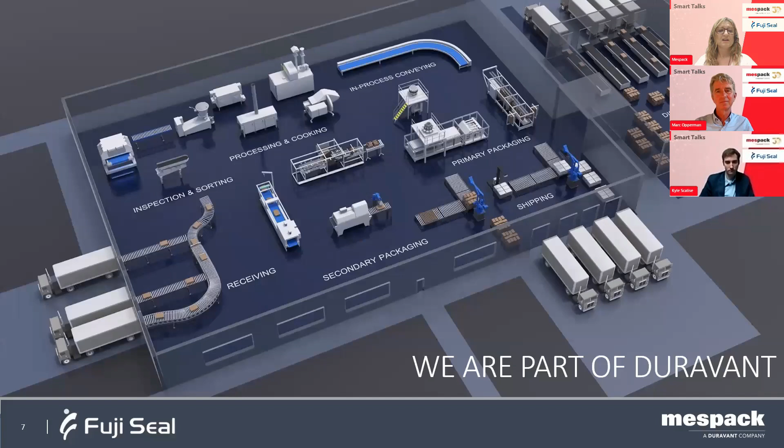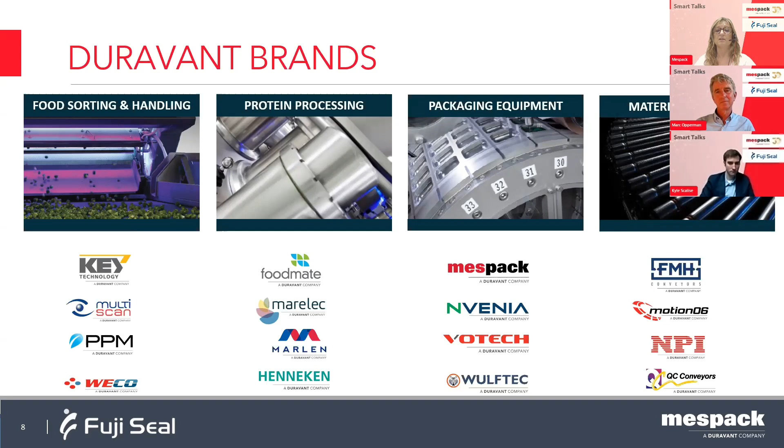Mespack, headquartered in Barcelona, is a global leader in flexible packaging and equipment for consumer packaged goods. We are known for our innovation in creating sustainable packaging solutions. Mespack has been part of Duravant since 2015, a leader in the world of industrial equipment, headquartered in Illinois. Duravant is a global engineered equipment company with manufacturing, sales, and services facilities throughout North America, Europe, and Asia. Duravant offers immediate and lifelong aftermarket support across different sectors, serving food processing, packaging, and material handling industries worldwide through its diverse portfolio of operating companies and brands.

At Mespack, our talented engineering team designs customized integrated solutions for primary and secondary packaging. We are located in Barcelona, established in 1984 as HFFS OEM, and we now have a worldwide sales and services network. We are part of Duravant, as we said before, and we serve a large portfolio of customers around the world.

We now have 380 employees, 80 engineers, and 120 service techs, with manufacturing and commercial offices around the world totaling around 70,770 square meters. Regarding our industry, we cover different sectors like food, beverage, pet food, pharma, personal care, and home care, among others.

In our portfolio, we offer design customized integrated solutions for primary, secondary packaging and end of line processes. With our extensive portfolio, we offer high precision, efficient, and versatile horizontal form, fill, and seal machines for flexible packaging, including machinery for pre-made pouches that you will see here today in our webinar, and a wide range of vertical form, fill, and seal equipment. Additionally, we provide Hydroforma machines for water-soluble pods and end-of-line equipment to fit your secondary packaging needs, offering turnkey solutions if required.

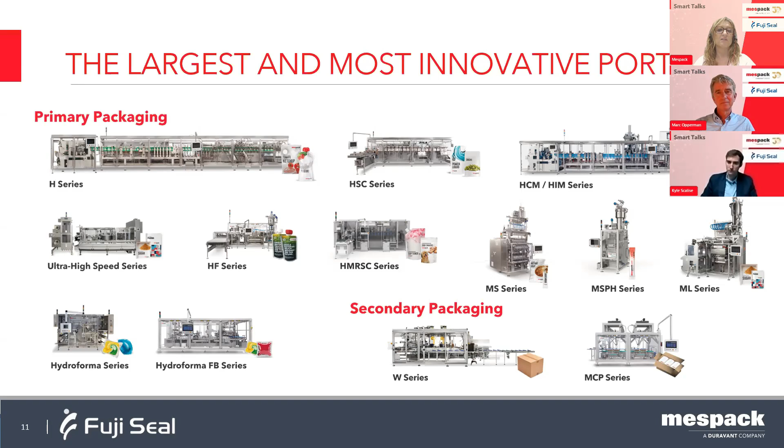At Mespack, we are really committed to sustainable packaging solutions, and our focus is on developing special mono-material packaging options which are easier to recycle and reduce waste. This marks the beginning of our introduction to Mespack, providing you the opportunity to familiarize yourself with who we are. Now it's Fuji Seal's turn. Marc, I'll pass you the floor. You have the remote control now.

Thank you, Monica. The slides are not visible for me. Can you bring the slides up? Now do you have the control, Monica? Yeah, I have the control, but I don't have the slides. Okay, I can pass them to you.

Is this okay, Marc? I'm not seeing the slides. Can you see, Kyle, the slide? Yes, I can see them. Well, okay, there we go. Yes, sorry, in the wrong screen. Perfect, thank you so much for that introduction there.

Fuji Seal indeed happily cooperates together with Mespack. We're in this partnership where we are going to help the market get the pouch introduced into new packaging means in your factories. Fuji Seal is a global supplier of packaging materials with factories around the world, in the States, Europe, Asia, Japan. We provide mainly 3 product groups: shrink sleeves, pressure sensitive labels, and spouted pouches. We also supply the equipment that comes along with those materials and the services required to get them to operate well. In this specific case of pouches, we work together with Mespack, and the machinery know-how of the filling comes from Mespack. We work together in this partnership to make sure systems work well at customers' factories.

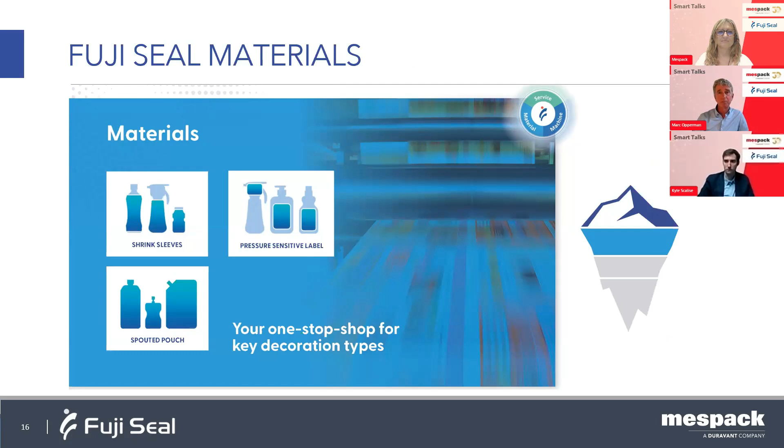Can you get me the control again? Thank you. These are the materials that show you the shrink sleeves, the pressure-sensitive labels, and the spouted pouches. In addition to pure decoration, we're also involved in the packaging itself, the container itself.

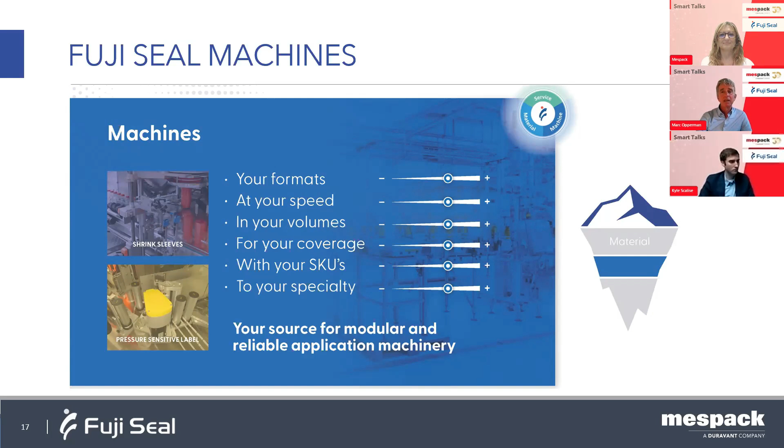Then we supply the machines that support those materials. They are well connected, so we can guarantee performance at customer locations. The machines run with high performance and high efficiencies on the materials that we provide, but also on materials that others supply, and you can run the machines with materials from other companies.

Underlying supportive services mean that every packaging material has its own specifics around design and how to create an artwork and get it onto a packaging material. We make sure we identify the right materials for your application, and we support the ramp up and startup of processes.

The topic I would like to bring to attention today is mostly the Fuji pouch. The Fuji pouch is a spouted pouch, as many others are, but the only difference is that the Fuji pouch has a unique shape, visible here. You can see the container is almost like a bottle because it's cylindrical, created by the fact that we have two gussets, one at the top and one at the bottom. In your screen you now see the so-called inverted pouch, which stands on its cap, but it's the same Fuji pouch, again with the two gussets, top and bottom.

The advantage of this shape is that it is more compact. So for marketeers, maybe not ideal, but for sustainability, it's the better format because it uses a lot less material than a typical doypack would. A typical triangular shaped doypack will always have headspace and will therefore use more material than this Fuji pouch, which you can fill almost brim full. This introduces the benefit that there is no air inside the pouch, and therefore less risk of oxidation and a longer shelf life.

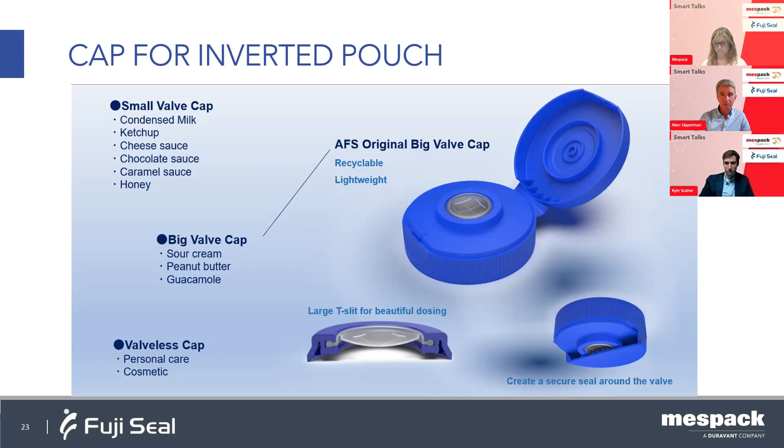The application is in many different products. Often we use a knife to get something out of a jar, or a tub, or a bottle is poured, and it stores air in the remaining top, or maybe you would apply a product from a cup with a spoon. At any rate, you empty out the packaging and air takes the place of the product. In the case of a pouch, which is all dosed through the nozzle, no air enters into the pouch, with the consequence that the product inside remains free from oxidation. You can also imagine that because nothing goes into the pouch, the hygiene level is a lot nicer than maybe in a jar or a cup. It's a convenient way of dosing, but it's also a lot more hygienic than an open jar or an open cup.

We spoke about convenience, about oxidation, pressure, the shelf appeal on pack, sustainability, and ultimately the evacuation. You can get all the product out simply by pushing on the pouch, and you can be sure that there's no residual product left when the packaging is wasted. The benefit thereof is obviously high on sustainability again, because if you have to remake a product, that is from a sustainability standpoint obviously the heaviest burden.

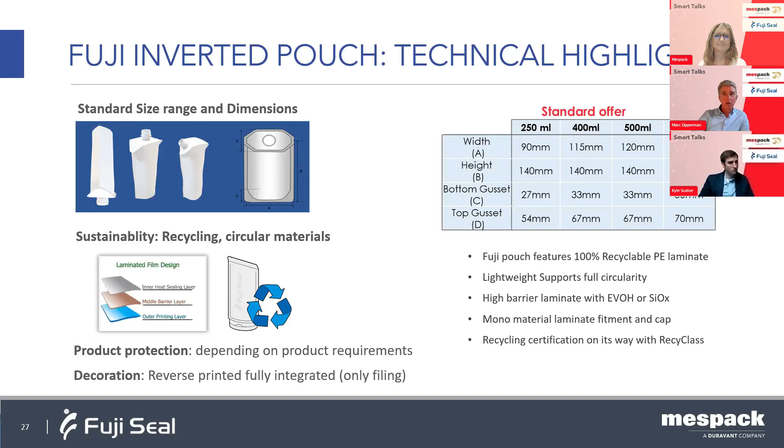But in the starting phase, maybe you don't want to bother making your containers yourself. So we would do that for you, providing a pre-made pouch which you simply fill in a filling machine provided by the partnership. The fitment and closure would be sourced by Fuji Seal.

We would make that pre-made pouch for you, and then that would go into your factory, where you would fill it in an HF series produced in Barcelona by Mespack. The alternative to pre-made pouches would be horizontal form-fill seal.

What's important here is to realize that these monomaterials have a melting temperature where all the layers lie very close together. The process of making that pouch and making a strong seal and a strong bag that is drop-test resistant and provides for your entire supply chain is in a way more challenging than before, when we had a surface layer of PET and an inner layer of PE with very different melting temperatures.

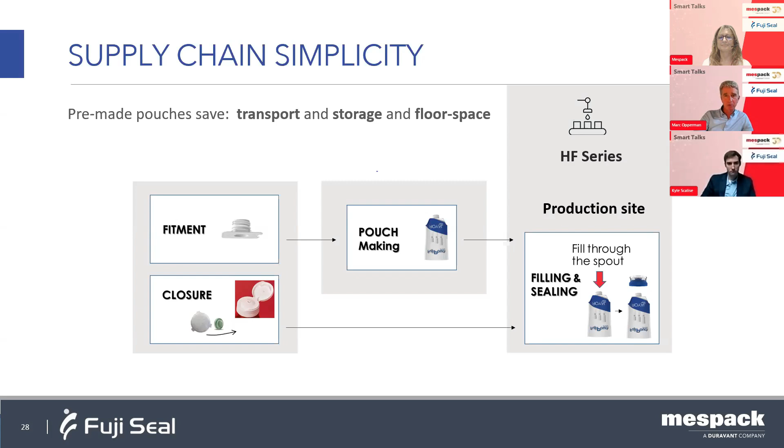Then I would like to hand the controls to Kyle here, who's going to explain the equipment that operates on either the pre-made pouches or on the form-fill-seal laminates.

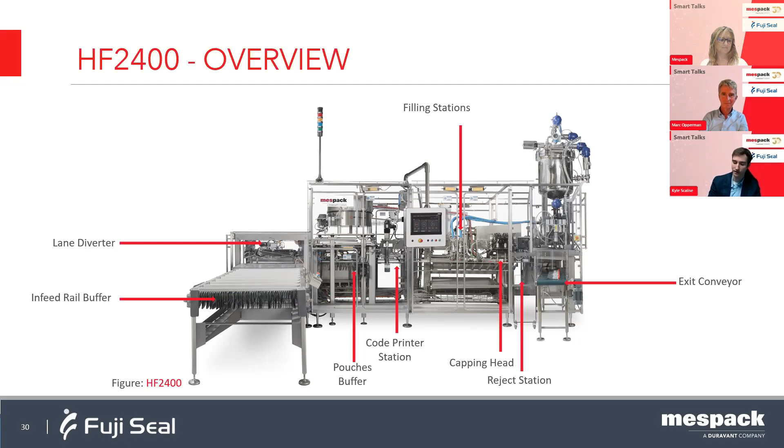We could also do some inspection in that area. We have our filling stations where we could do flow meters or piston pumps, depending on the characteristics of the product, whichever makes the most sense and meets the customer's requirements. We have our capping head where we apply the cap, and the reject station in case of any empties or if you run out of caps, so we reject without filling that pouch. Lastly, we have our exit conveyor where pouches are laid down on their back with the fitment to the side, leading to any downstream conveying systems.

Diving in further, here's an overview of the HF 1200, our entry-level model of the HF series. This machine can run up to 80 pouches a minute mechanically, so on a 150 milliliter fill, for example, 80 pouches a minute should be no problem. The machine has a maximum fill size of 1 liter, and at that size you're typically running around 30 to 40 pouches per minute, depending on the application.

On the HF 1200, on the left we have our in-feed, which goes through the pouch buffer. The star system transfers it from the rail system over to the walking beam side of the machine, where we hold the pouches by the neck of the fitment. We convey the pouches left to right throughout the machine, all by handling it at the neck. So below the neck, as long as the pouch is within the set criteria we can handle, we really don't care how it looks. It could be a die cut pouch, a curved pouch to assist in holding it, or a traditional Doy style pouch.

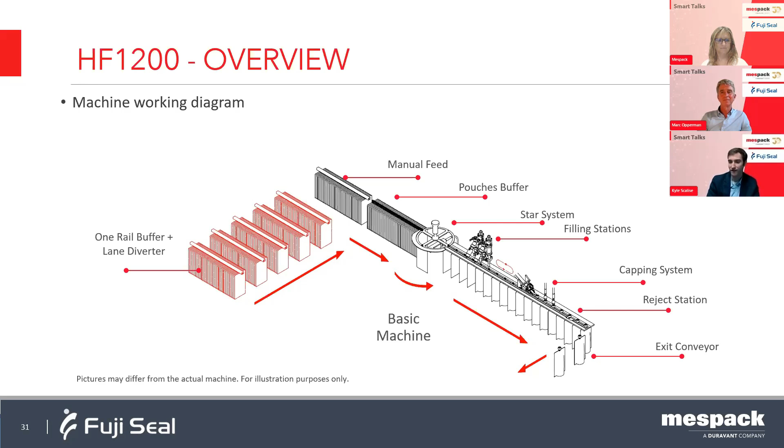After it's transferred off the rail system via the star system, that's where we can also apply the date code and a vision system to detect that, say, the barcode matches the HMI SKU you're running, so there aren't any errors or batches run of the wrong product. Then we go through the filling section, the capping, and the reject station, like I mentioned previously.

Here's an overview of the various models we offer. Apologies to anybody in the US, everything shown here is in millimeters, but I'll translate for you. On the HF 1200, we have the ability to run up to 80 pouches per minute, and a maximum format of 160 by 300 millimeters, width by height, and a minimum format of 70 by 100 millimeters. For the US, that's roughly 6.3 by 11.8 inches maximum, and 2.75 by 3.93 inches minimum. Again, we can run a maximum volume of 1 liter fills on this machine.

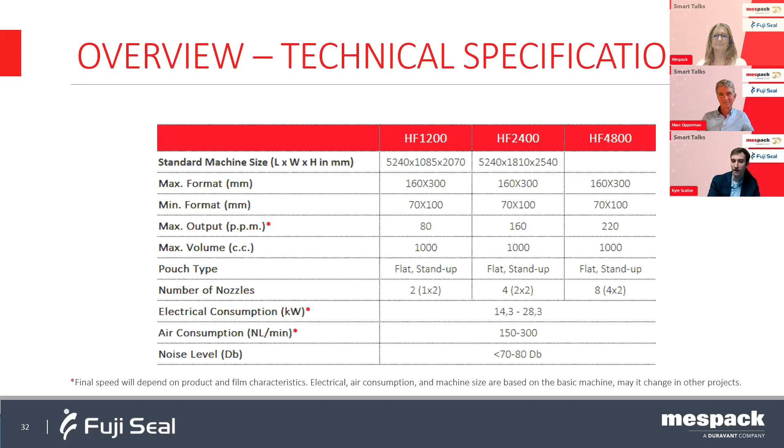The HF 1200 has the ability to have 2 different pumps and nozzles, just to maximize the output of the machine, where we're dosing in continuous motion. On the HF 2400, it's the exact same bag range, however it does increase the output up to 160 pouches a minute because there are now 2 lanes, which we'll get into further here in a bit. Finally, the HF 4800, our largest machine, is actually a 4-lane machine and can accommodate up to 8 different pumps due to the 4 lanes, each requiring 2 pumps and nozzles. On that machine, we have a maximum output rate of 220 pouches per minute.

On these machines, we offer many different pouch types. Since we hold the pouch via the neck of the fitment, we really don't care what the design of the pouch looks like below that. It's a very flexible machine in that regard. We can work with flat or stand-up pouches like shown on the left, or in the middle, flat or stand-up pouches with a corner cap, even with a handle. And finally, we can do die-cut pouches if your marketing team wants to get a bit creative.

Some of the machine highlights.

On this machine, we're filling through the spout, which allows us to reduce the size of the overall pouch. In turn, this would result in some savings, hopefully on the customer side. But also, by filling through the spout, we can reduce the head space up to 15% compared to a traditional filling machine where we would dose on the open void and then seal the top. If you're dosing through an open void and then sealing the top, you have to accommodate a little bit more head space just to make sure the product doesn't get in that seal area. Whereas filling through the spout, we can minimize the pouch size, and we're not as worried about splashing within the pouch.

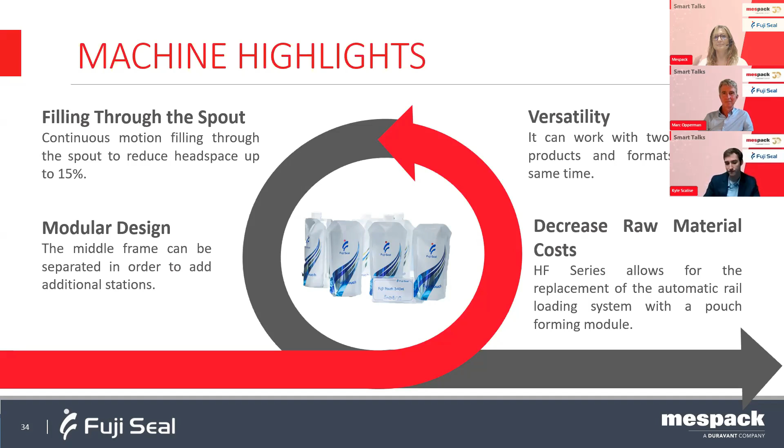So walking through the various machines, kind of an overview of each individual layout. On the HF 1200, which can run up to 80 pouches per minute, it's a single lane machine. So pouches are fed into the machine and just indexed into the single lane.

Whereas on the HF 2400, it's a 2-lane machine. Pouches have that single infeed from the original photo, but they go through what we call the smart lane diverter. So we can actually detect, say you have alternating rails, pouch A and pouch B, and you can run each lane independently. So on lane A, you can run orange juice, for example, whereas on lane B, you can run apple juice. And we could detect that pouch within the rail and make sure it's diverted to the appropriate lane.

On the HF 4800, it's a 4-lane machine. So again, you have the ability to run multiple different SKUs all within the confines of one machine.

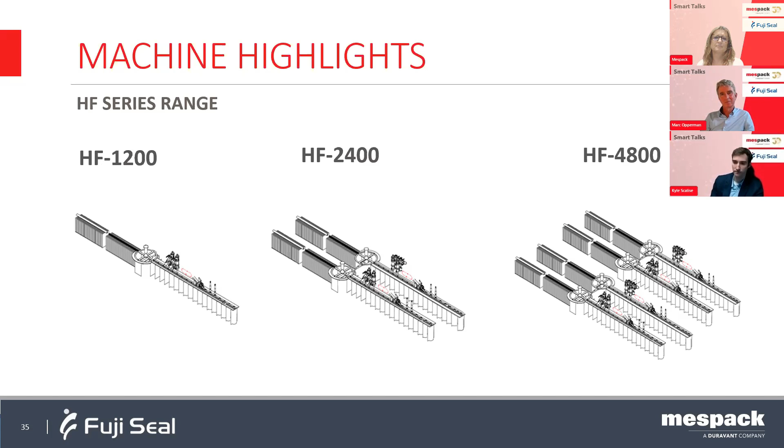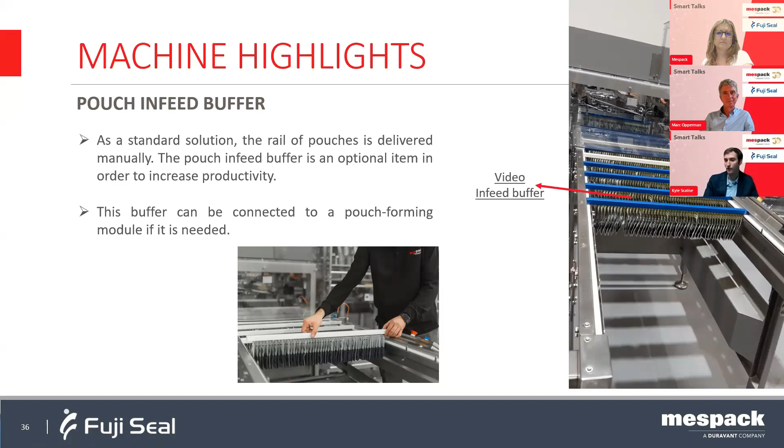So your operator would load the rail onto this in-feed belt, and it could hold anywhere from 16 to 18 rails, which is customizable. And I mentioned the A and B side. If you can imagine, you see these blue rails versus the white rails. If you alternate those, for example, on an HF 2400, that would allow you to run 2 different applications within the same machine, and the smart diverter would divert those to the appropriate lanes.

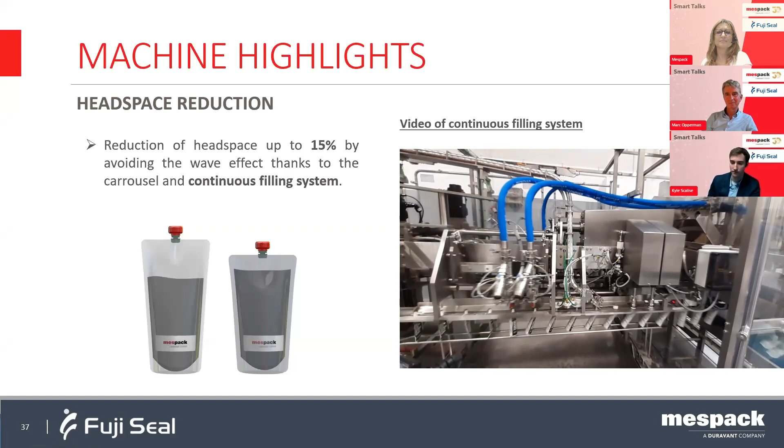Again, the star system is what takes the pouches off of the rails after they get pushed into the machine, and then indexes them and rotates them onto the walking beam side, what I'll call the filling side of the machine. During this motion is where we have the ability to apply the date code, whether it be inkjet or laser. That all can be done in this area here.

But we also have the ability to add an inspection system. For example, if you want to verify that that date code is either present or legible, we could add an inspection unit in this area as well, just to accommodate that.

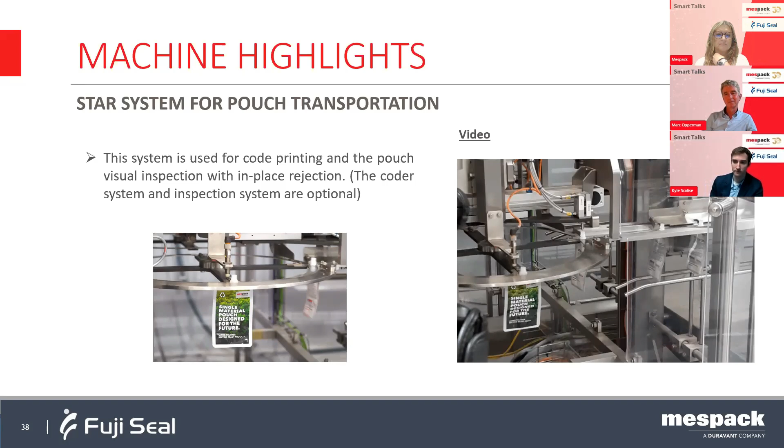We also have a secondary pouch inspection station which we can apply to make sure the barcode, for example, matches what the recipe on the HMI is showing. You don't want an operator loading orange juice pouches when you're running apple juice. So here we can accommodate some technology to make sure there's no operator error and to minimize any unfortunate mishaps.

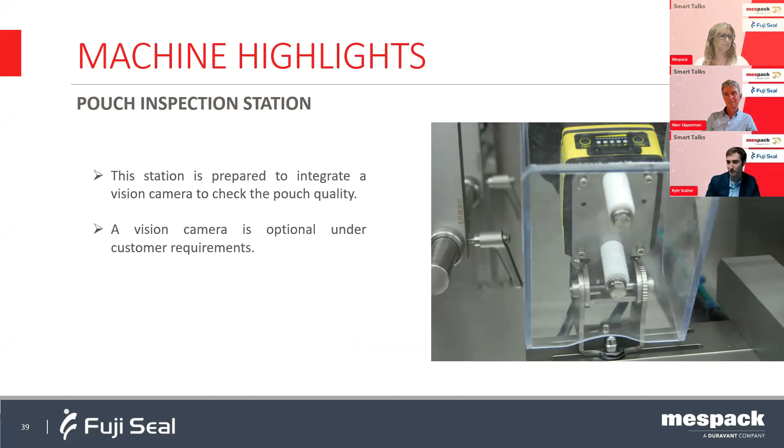We do offer an inline spout cleaning system where we can spray filtered water on the spout before we fill, before and after depending on customer requirements, just to make sure it's a clean environment. We can also do hydrogen peroxide or general steam, depending on the application and customer requirements.

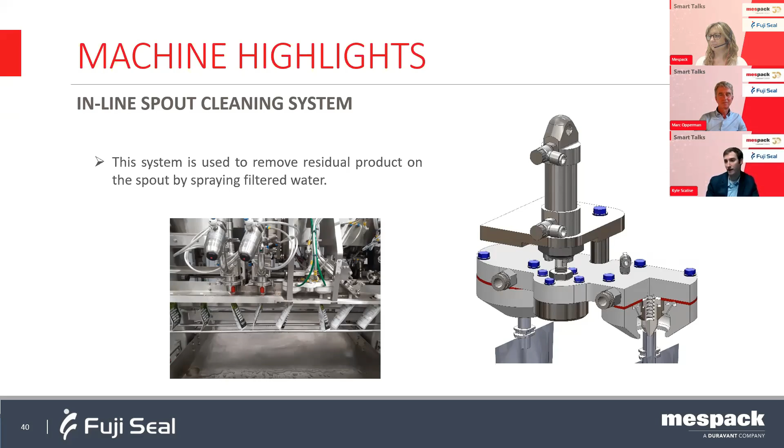Just a couple of summaries of the features, advantages, and benefits. We won't touch on all of these, but I'll go through some highlights. Filling through the spout again reduces the headspace in the pouch, which in turn allows you to minimize the overall size of the pouch, hopefully resulting in savings on the customer side. The machine, as I mentioned, has the ability to run, if you have the HF 2400 or 4800, two different applications within the confines of one machine at the same time. And continuous motion filling increases the filling time and overall increases line performance.

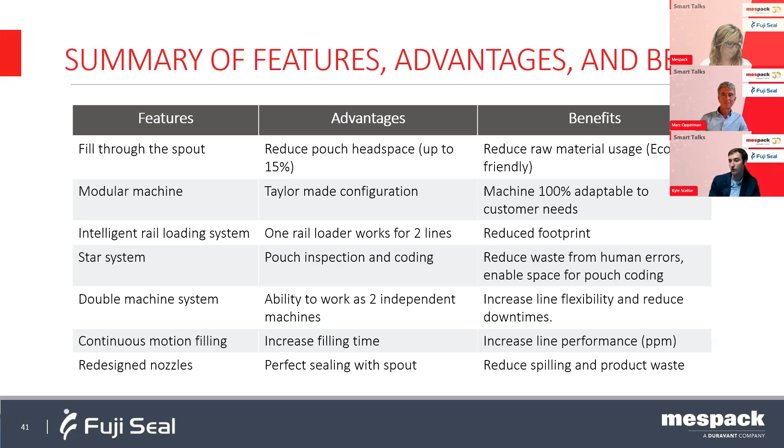We also offer a mechanical tear off. By that I mean when we apply the cap to the spout or fitment, it's done by mechanical means using a spring system, so the pouches are on an angle and easily loaded onto the fitment. We have an option to pre-screw before we apply the servo-driven screw motor, just to make sure the cap is fully applied to the spout prior to the servo-driven motor coming in to apply that screw. That results in less wear and tear and decreased maintenance costs, as there's virtually no maintenance required with that mechanical tear-off system.

Another big highlight of this machine is its overall compact footprint. In length, the machine is about 17 feet, for those in the US—apologies to everybody in Europe. Overall, the 2400 is about 6 feet in width, whereas the HF 1200 is about 3.5 feet in width, and the overall machine height is around 7 to 8 feet depending on the application.

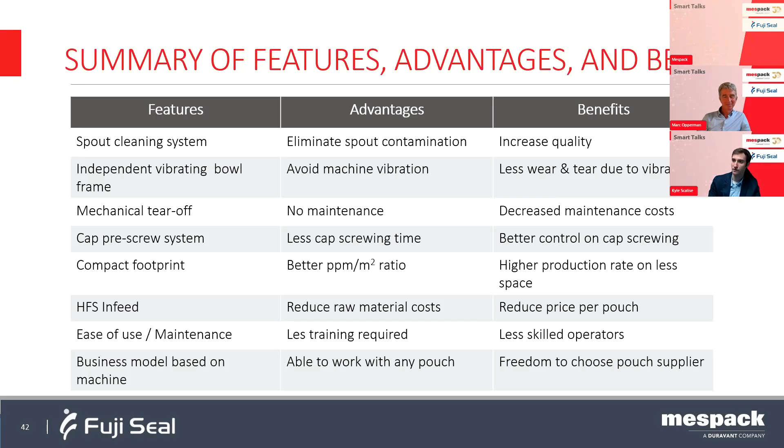All of our machines are outfitted with what we call Mespack Athena. Athena is on the HMI—it's a digital user interface, a digital platform if you will, that accommodates a lot of different functions across an organization. It simplifies the operator experience, requiring less clicks to get to any given task throughout the HMI. It's also a very good data collection asset within an organization.

For example, using this Athena software you can track the main stoppages of the machine. If you had a report at the end of the day showing 20 pouches being rejected, you can dive into the details of why those pouches were rejected. You can access all of this remotely if you have the cloud version of Athena, or the on-premise version if your IT for whatever reason wouldn't allow that. You can also access it on-site at the machine level.

If remotely, you can access this via an iPad. So if you can imagine having multiple facilities each with their own machine, remotely you can dial in and see real-time data of how the machine's performing, the top reasons for rejects, and the top reasons for stoppages. This can help drive overall operating efficiencies, in the sense that you can be more pointed in what you need to focus your efforts on from a maintenance perspective.

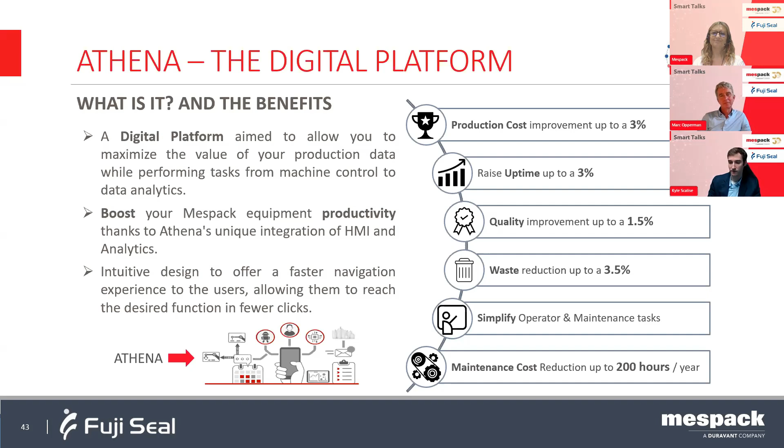You also have a document reader embedded on the HMI, so you can pull up the actual manuals of the machine. If an operator doesn't understand what a part number is, he can easily open that up via the HMI to help diagnose and identify what part number that is.

With an introduction we'll be showing at Pack Expo this year, we're showcasing a feature called Hello Mespack, which will allow any operator to reach out to a customer support or service representative of Mespack in real time. On the back of the HMI, we can ship the machine with an iPad, which you can dial in through a Teams call for remote assistance.

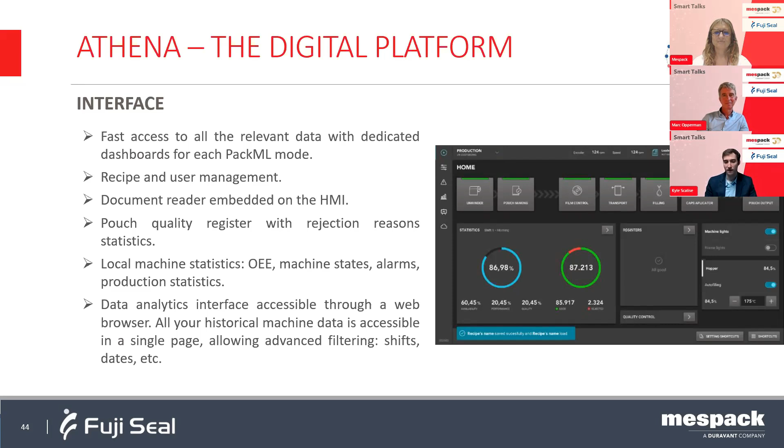One of the main benefits of our strategic partnership with Fuji Seal and Mespack is the all-inclusive sales contract, as we call it. This is basically a go-to-market strategy or agreement we've placed with Fuji Seal, where a customer can either buy a machine directly through Fuji Seal or Mespack, or we can do what we call the all-inclusive sales contract, where we bundle services together.

This includes aftermarket service and support, say quarterly service visits, a spare parts package for a year or two depending on the customer's requirements, along with a sales contract with the film to create a kind of pay-as-you-go strategy as a form of sales contract.

So this is a very unique kind of go-to-market strategy that we're now offering, and we're hoping this could open the door to some more entry-level customers that may not have the original CapEx ability to buy a machine outright.

Maybe I can build on that a bit. So indeed, we're very open to support that financial aspect of this introduction of a new technology.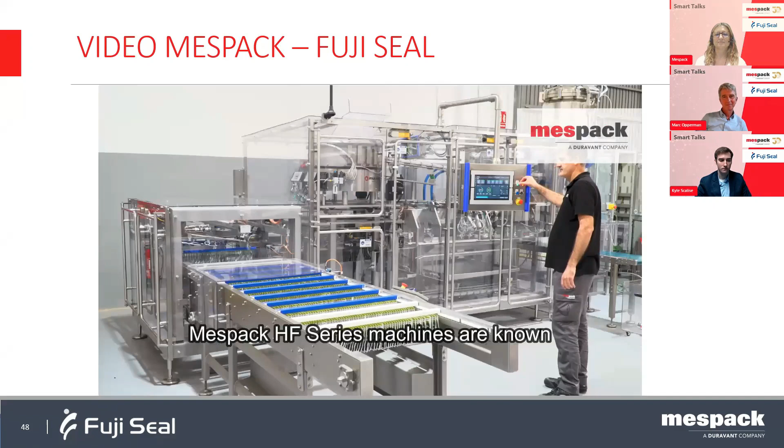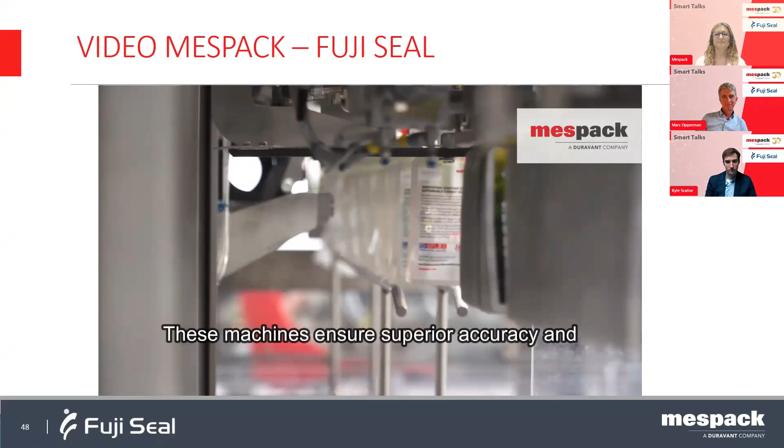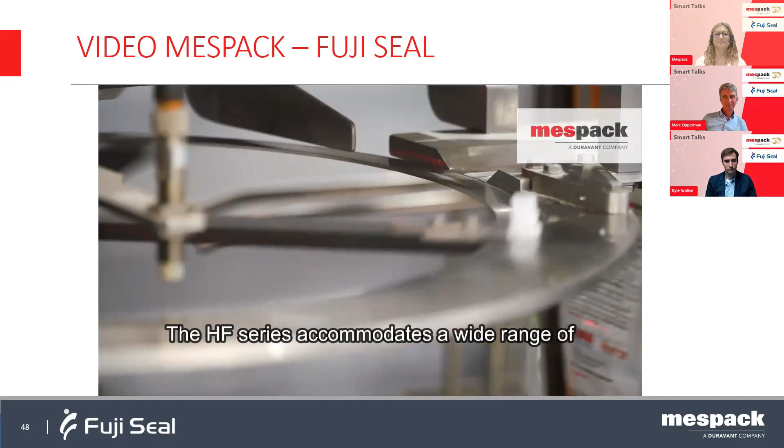In regard to filling pre-made pouches, the Mespack HF series machines are known for their exceptional versatility, with cutting-edge filling technology through the spout. These machines ensure superior accuracy and reduce product waste, minimizing headspace by up to 15%. The HF series accommodates a wide range of pouch sizes and formats, catering to diverse product and packaging needs.

In our pursuit to create ever-innovating packaging for your product, we introduce the Fuji pouch: a one-pouch body that can be adapted through the cap, transforming it into either a bottle or a tube, with curved shapes for a more comfortable grip. For the same product volume, we reduce the package weight. The Fuji pouch offers the same user experience as regular packaging types, but uses less space and less packaging weight, while the pouch body enables less waste of product and packaging material.

Important features that reduce the Fuji pouch's carbon footprint make it a sustainable packaging solution that contributes to a better environment. Get in touch to find out how your product can benefit from the Fuji pouch.